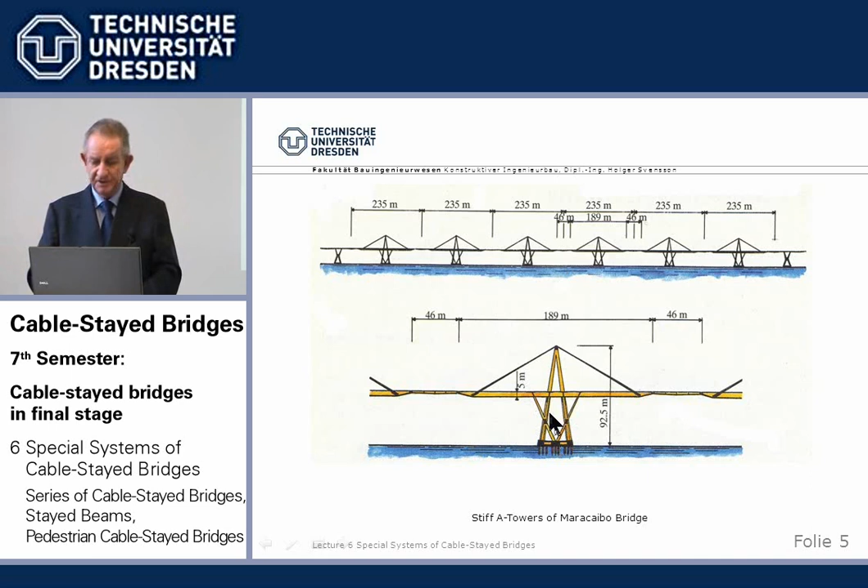We had to replace the cables and things, but it's there. It's the basic solution, use stiff A towers. And we see here the whole bridge. It is a major bridge. It says here 1962, very early.

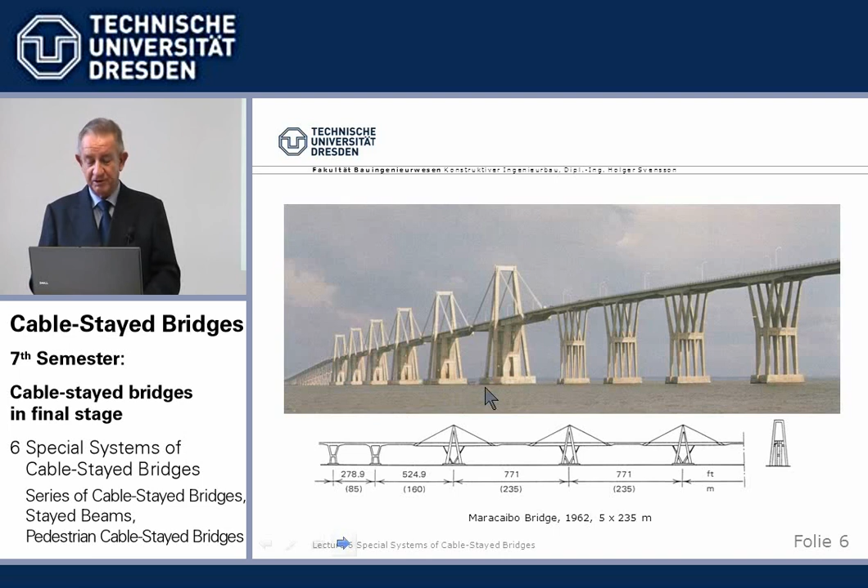So, A towers. Now, another possibility is if in every second span we place a hold-down pier. Then we have something very similar to our regular cable-stayed bridges. And we've actually done it.

I told you about the Orinoco bridges. Now that's the second bridge across the Orinoco. And ship traffic required 2 traffic lanes in the range of 300 meters, I think it is. Separated because there's an island. So one could place 2 cable-stayed bridges back to back.

We need then here a vertical hold-down, perfectly normal. We've retained the tower head by the backstays.

Now, since this is also a railway bridge, I told you about building railway bridges there in Venezuela. Railway bridges have very high braking forces, much higher than roadway. Whenever you have to deal with a railway force, the load is higher and things, but the main problem is the braking. Now, if we have a long train here and they have these heavy ore trains there in Venezuela with real high braking forces,

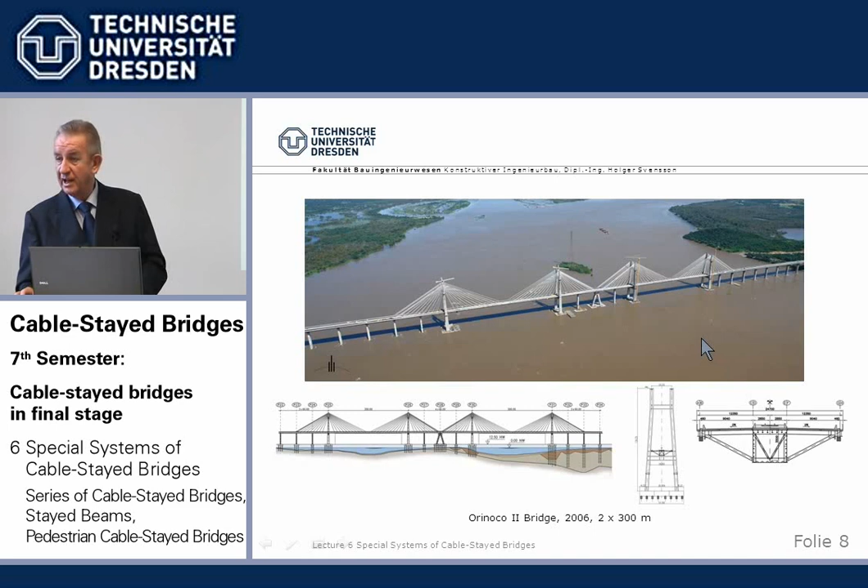We can then use various ways of tying back or connecting the tips of the towers. We can use a straight line, tie the tip back to the next one, or we can overlap.

Here the problem is that these are considerable spans often. If you remember the sag and the effective modulus of elasticity I told you about: the less tight we make this cable, the bigger the sag, the smaller the effective modulus of elasticity, the less effective these cables are. Well, say, okay, use big cables and pull. Easy, but then where does this force go? It has to be carried all the way back in the beam, and the more I stress it there, the more compression I have in the beam, which costs money again.

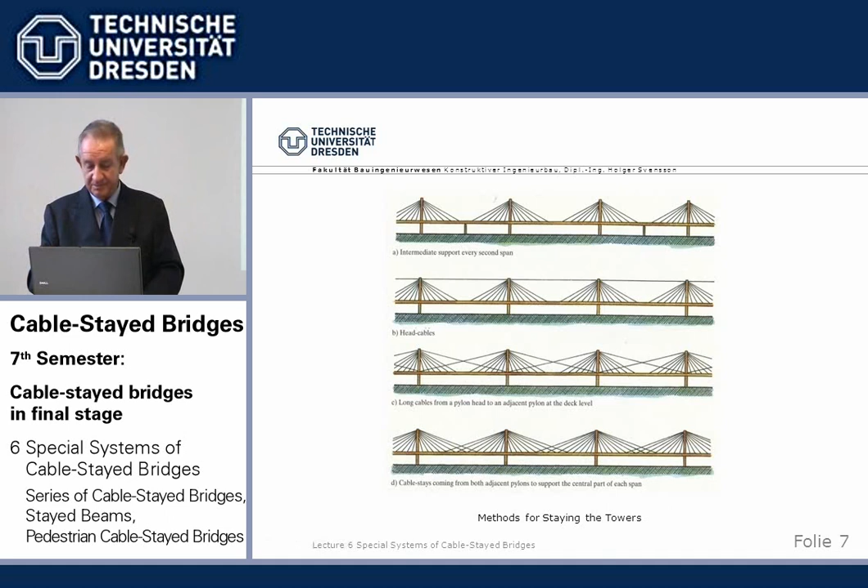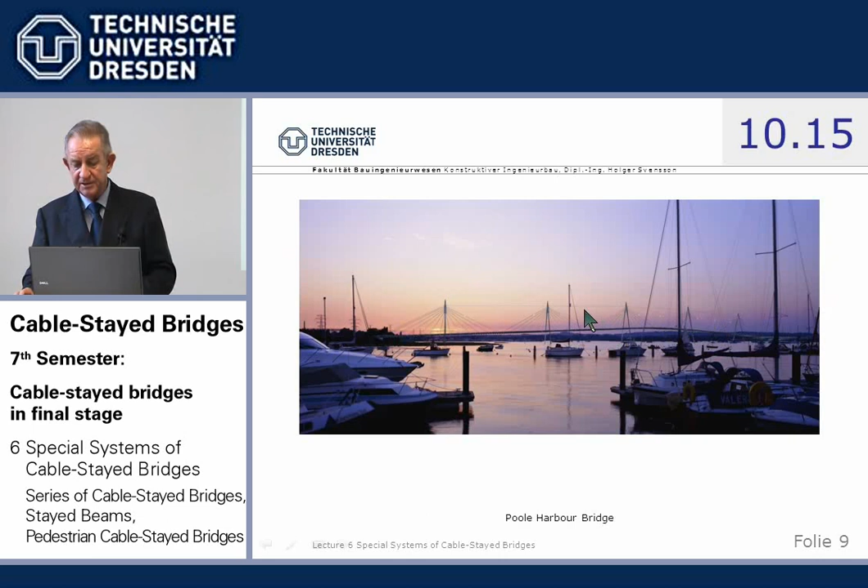So it's a little bit of playing around, and I'll show an example. This was actually only a design for Poole Harbour Bridge in the south of England - now it's two triangular flaps of a bascule bridge which is built. But there was a design which, if you look very closely, used a series of cable-stayed bridges, and the tower heads were to be connected by horizontal cable. Built is the Munksjö Bridge in Sweden. If you look closely, you see several main spans, and here is a twin cable which ties together the tower. So those are examples.

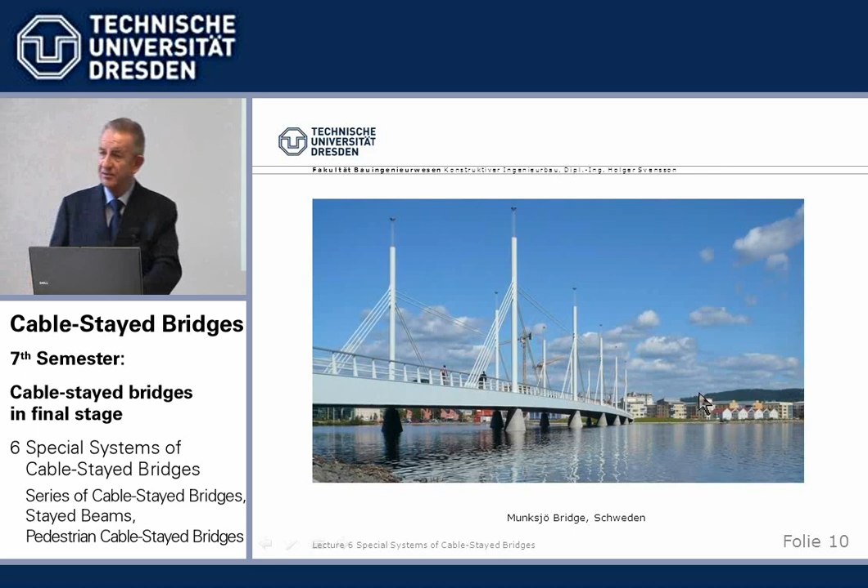Examples for tying the tower head to the next tower at beam level is the Ting Kau Bridge in Hong Kong, which Schlaich Bergermann did. You see here, it looks a little awkward. The big tie-back cable has a visible sag - otherwise, the forces would have been too big. And it sticks out like a sore thumb.

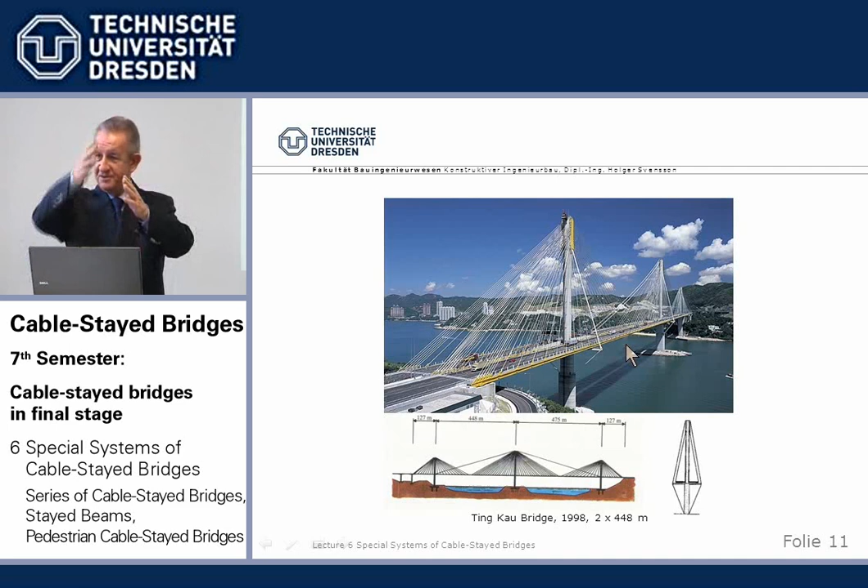Optically or visually it's a little bit questionable. Unique also that the towers are also stayed transversely. Towers are slender, and in order to keep them in place transversely, they are stayed transversely. You may remember our very first lecture, I talked about the French name for cable-stayed bridges, pont à haubans, and I told you that haubans are what we call in German Wanten - left and right of a sail ship mast to keep it in place, shrouds in English. And that's a cable-stayed bridge which uses this system of transverse staying.

The third possibility was purely theoretical until what - two years ago. When I made the first draft, I had the system in but had no example. But then Ove Arup made a design for a new Forth road bridge in Scotland and used this type with overlapping stay cables. I said, beautiful - now I have an example for this theoretical thing. There were two bidding groups, and we were lucky enough to be with the winning bidder, my company, and we are currently doing the detailed design for this one. It seems to work - overlapping of the stay cables in the center.

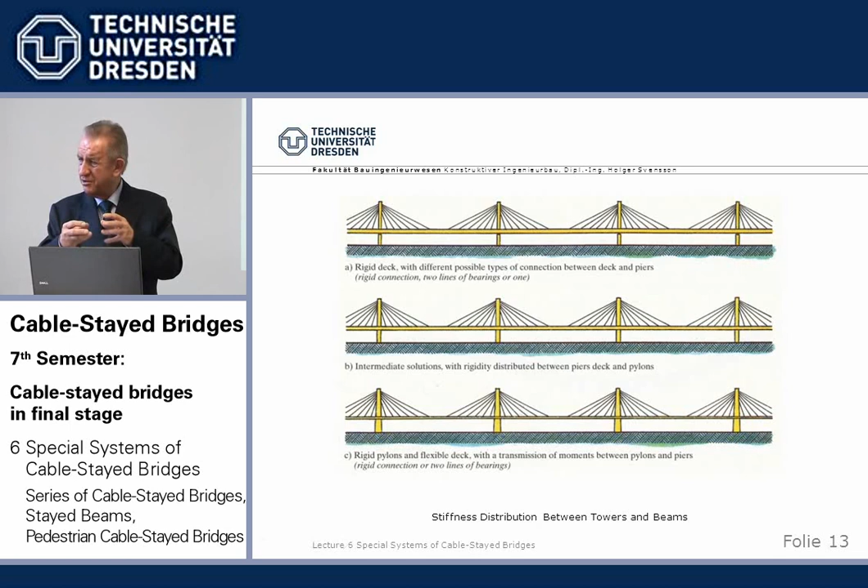Next possibility is to use a frame system connecting the beam and the tower. One can then play with the stiffnesses. You can either say we make a strong beam and just hang it up on a small tower, or we say we make very strong towers and hang up a light roadway slab. That is really playing with the stiffnesses. It's not so very obvious if you look at the system what it is.

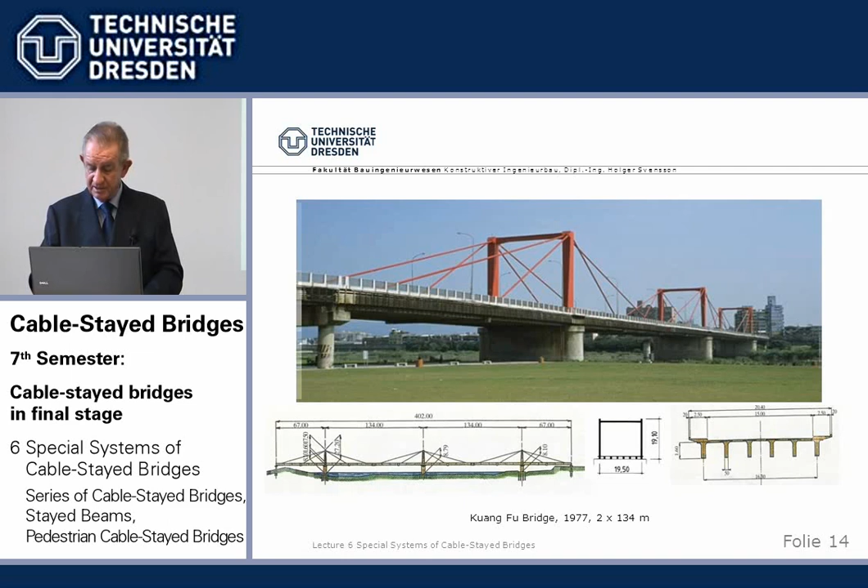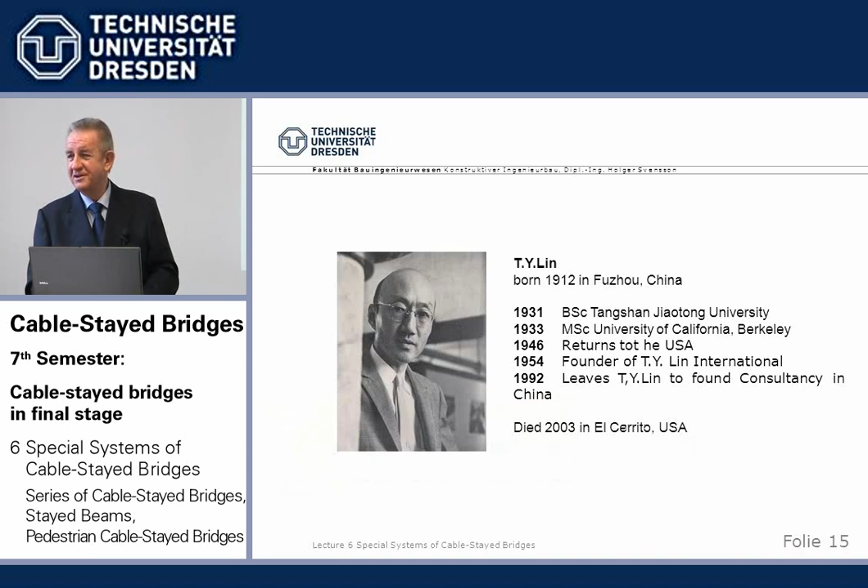One example is the Kuang Fu in Taiwan by the famous US engineer T.Y. Lin. Here he's very young - I knew him when he was older, a typical outstanding Chinese engineer who lived in the US all the time. Outstanding ballroom dancer too - when we had some festivities, he danced very well, T.Y.

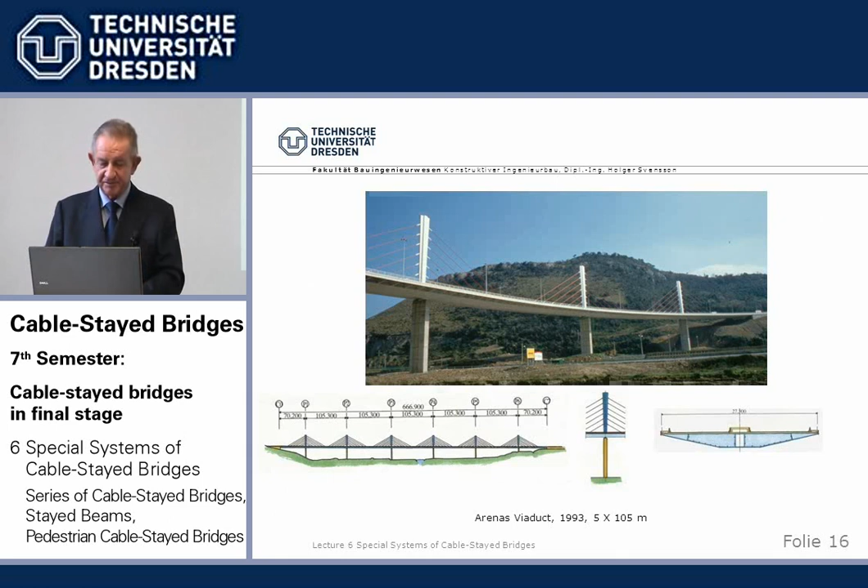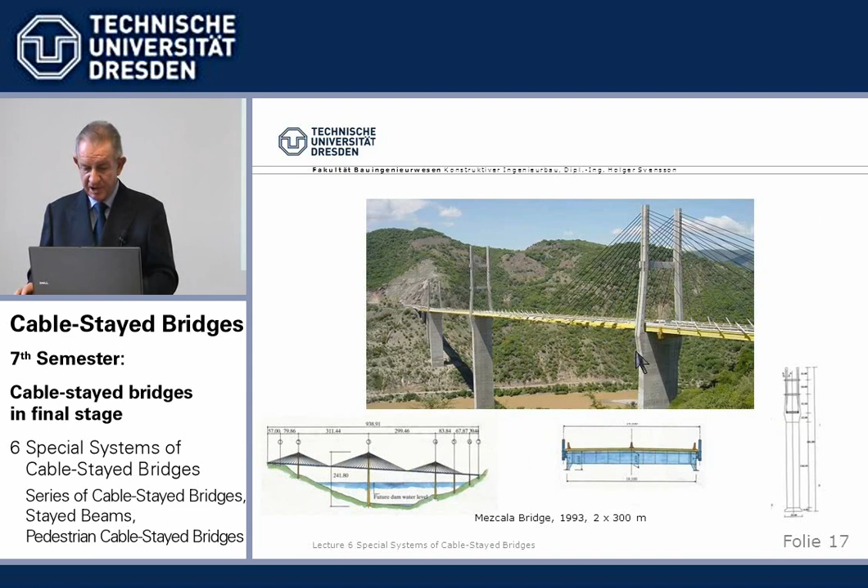Another frame system is the Arenas viaduct, by the Spanish engineer Arenas - or the Mezcala Bridge, all in Mexico, for a new highway across Mexico. There they had to cross wide valleys. Composite designs, concrete slab, steel, and frame action in bending - this whole thing works, one just has to calculate it.

Another very interesting bridge is the Sunniberg Bridge by Menn - he's not here, we had him somewhere else - in Switzerland, near Klosters, across a valley. Architectural considerations by the engineer drove the design: they said, okay, we're already very high, 140 meters above ground, so we don't want another 100-meter high tower in the beautiful Swiss Alps - doesn't look nice. So they wanted this as low as possible, with towers sticking out just above the roadway slab.

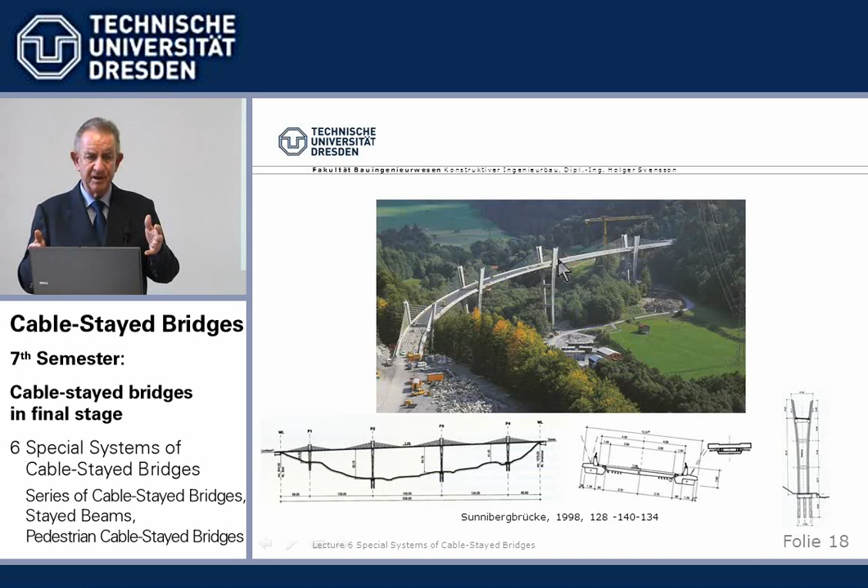Of course, we want a very slender roadway slab, and so came out something which we could also summarize as a, let's say, extradosed cable-stayed bridge. I prefer 'stayed from above,' but anyway it's something like that. It's a mixture between a continuous girder and additional stays on top of the piers. The whole thing was curved, so you had to adjust the stays to the curvature, and there are deviating forces. It's quite involved, a very nice, technically interesting design, and an excellent solution for this beautiful Alp valley in Switzerland.

One of the biggest, most imposing recent series of cable-stayed bridges is Rion-Antirion in Greece. This will be part of a special lecture next semester where I show you in detail how that was built, under very difficult earthquake conditions. The beam is continuous over 2.5 kilometers, hanging only in the cables with no vertical support, with plus or minus 2.5 meter movement joints at the ends for temperature, shrinkage, and creep. It's composite, and the towers stand using A-frames in both directions - longitudinally and also transversely for the wind. So if we want to use the word quadruple legs, we have 4 legs on each tower, and every section stands by itself.

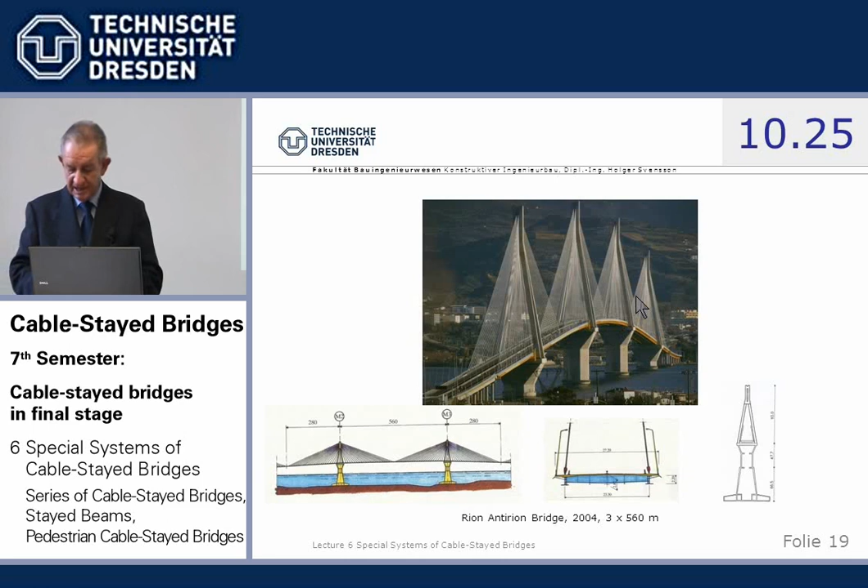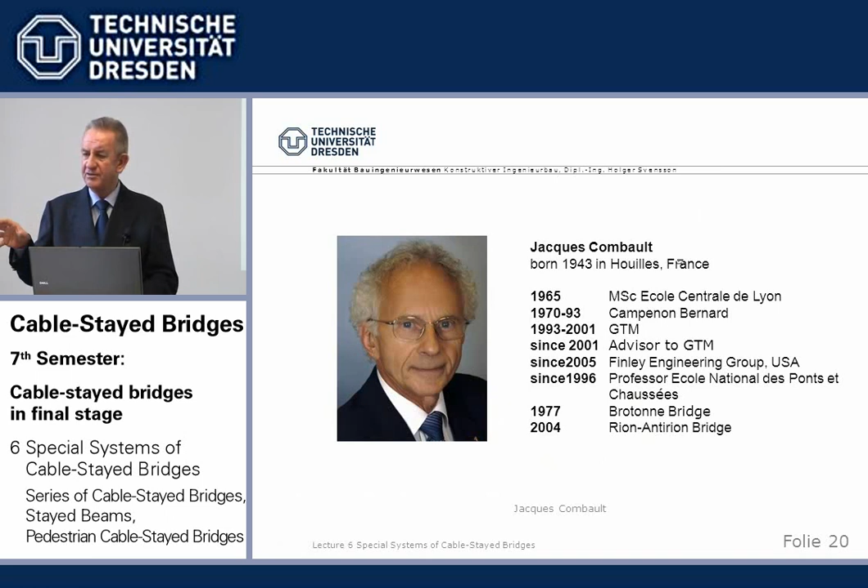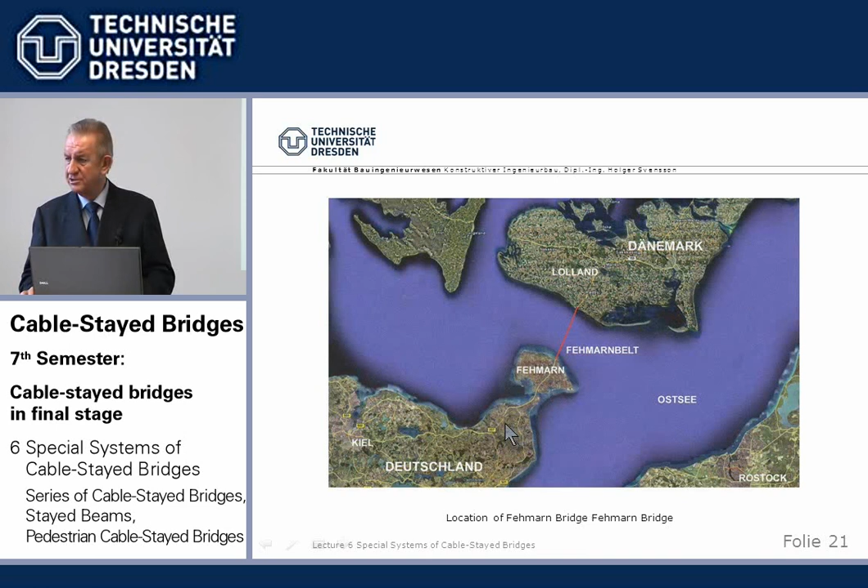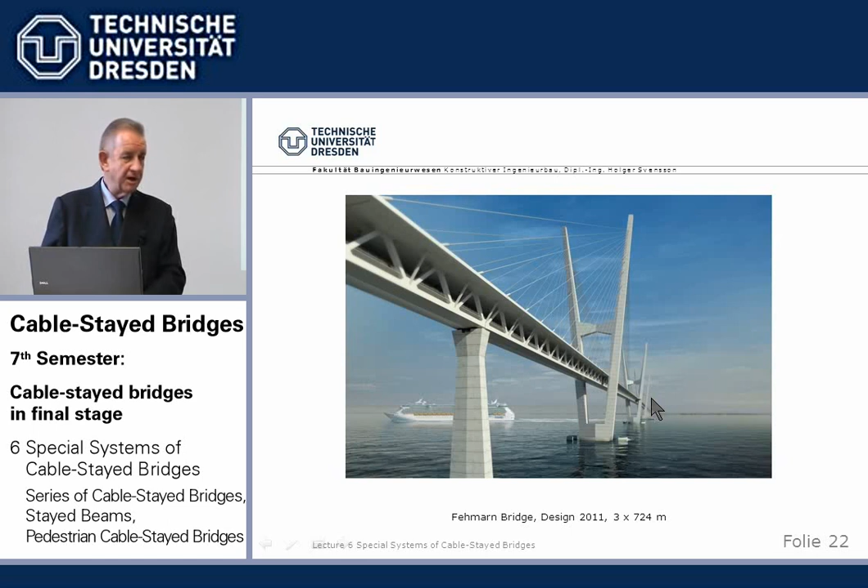Here was Jacques Combault. Another interesting project in this connection is the crossing of the Baltic Sea, 19 kilometers, which is under design. Our group designed a cable-stayed bridge with a truss using a different tower design - basically A towers standing by themselves. However, due to political reasons, most probably the tunnel will be built and not our beautiful bridge. Well, such is life.

Other possibilities of using frame actions, and in addition, we have to cater for changes in length. If we have a drop-in girder or just a joint, the driving comfort suffers, because whatever you do, you'll always get the feeling there's some sort of joint if you don't have a continuous structure. The worst is in precast slabs - somewhere in Italy, the Autostrada del Sole, where you go bong, bong, bong, bong, bong, bong.

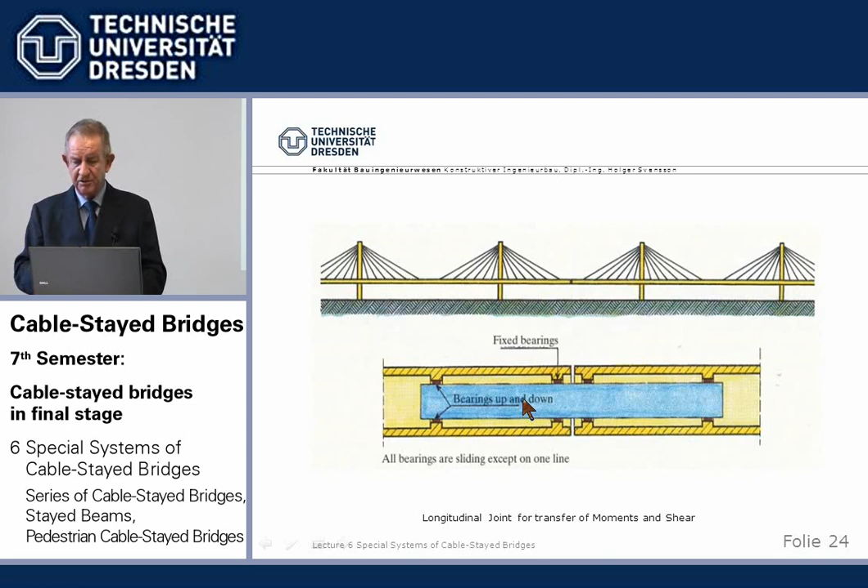So it's better to avoid these joints, at least where they make a kink due to creep or whatever. It is possible to use a joint which is stiff in bending, for example using 4 positions to support such a beam. It's a little theoretical - it can be done, but I don't think it has ever been done. So the best is to avoid the joints.

These stiff elements, where we have problems with changes of length of the beam, create two requirements on the towers. On one hand, the tower must be able to carry live load in just one span, so it must be stiff - I told you an A tower, but you can make it very stiff. On the other hand, because of the changes in length of the beam, and since we try to avoid joints, these towers must be flexible horizontally against changes in length from temperature, shrinkage, and creep.

There's one known solution where we split up the tower in the lower part like a washing cloth. Now, if we have a load, the force runs up, the moment goes down, and the moment is split into a force couple - compression and tension - going down these two halves. But because the lower part is split in two, it's very soft horizontally. We know this system from free cantilevering: when we free cantilever out, we can take the moment, but we're also able to move horizontally. So that's the trick here - stiff above, splitting the moment into a force couple of tension and compression, but once you split it, the horizontal stiffness is very low, so it can move with shrinkage and creep.

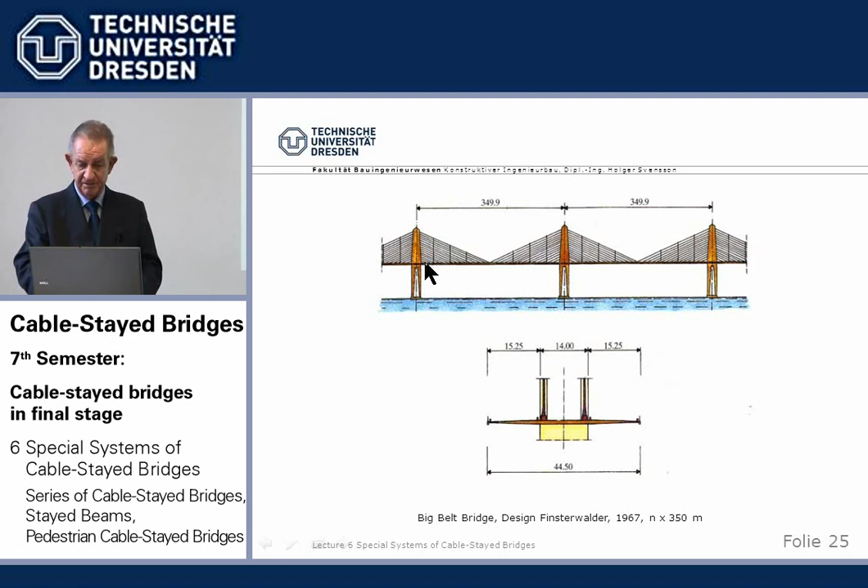That was an old design by Finsterwalder for a crossing of the Great Belt, from 1967, but it's a very nice idea. Other systems - I'm just thinking, in modern days the same idea was taken up by Virlogeux in France for the Millau Bridge, which we also have a special lecture on.

Required a very long crossing of the Tarn River in the south of France, and it is done. We have an A tower, which is stiff in bending in this direction, we know. And then we have the up to, I think, 270 meter high piers, which are split. You can see it here, just split in two parts.

The moment from the A is going into the two legs of the split tower in tension and compression. And the whole 2.5 kilometers beam are continuous. Their fixed point is basically in the center. And from there the beam moves in and out with temperature. It's a steel beam, but the split piers, split in the top half, can follow. That's a trick. We will see that in some detail.

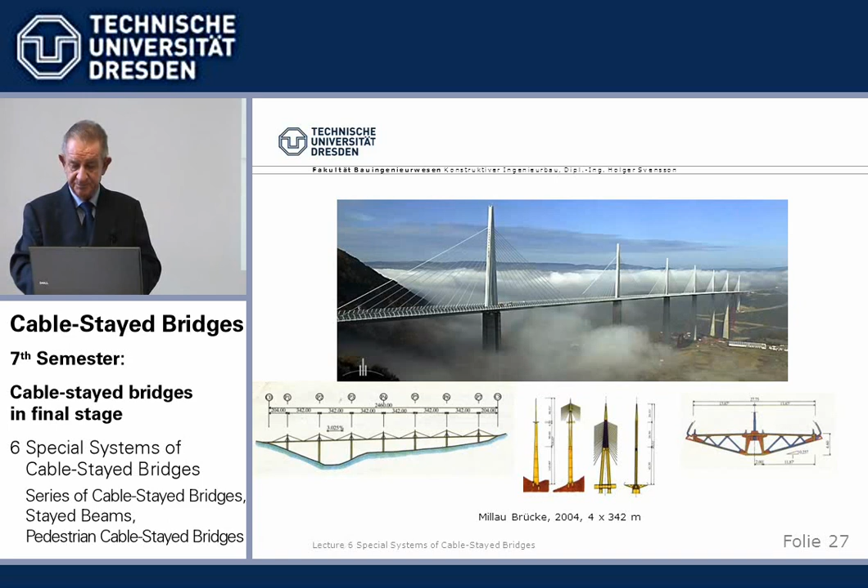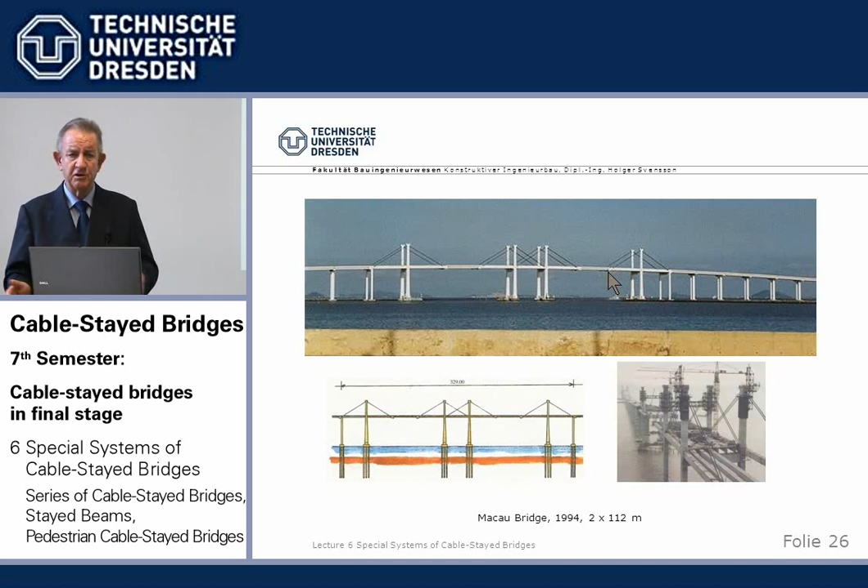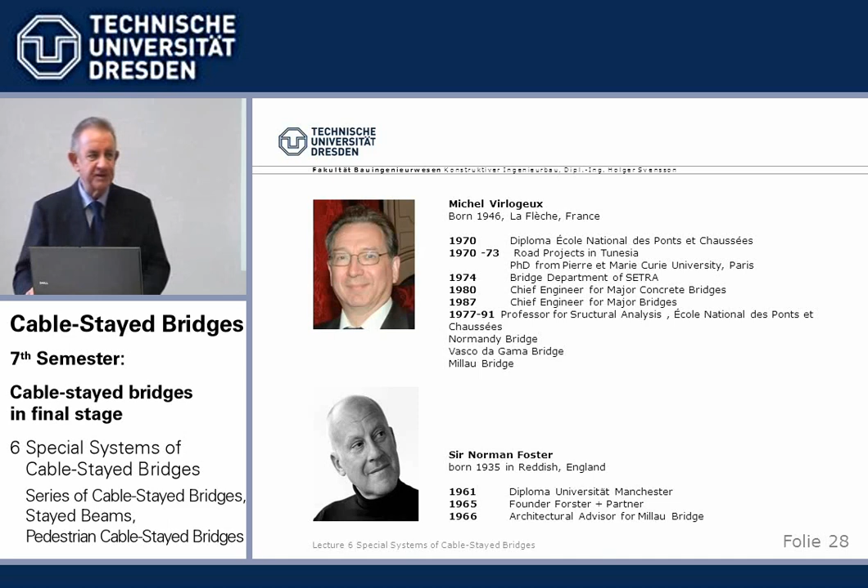Here we have Michel Virlogeux, the engineer of the Millau Bridge, and the architectural advisor was the famous English architect Sir Norman Foster. I stress, however, contrary to some publications, Foster did not design the bridge. The bridge was designed by Michel Virlogeux, but Foster gave a hand in shaping that thing beautifully.

Okay, now those were a series of cable-stayed bridges. Now we come to stayed beams, as I call it. We had the problem in the, when was that? '78, yeah, in the 70s. Freeway from Stuttgart down to the Lake Constance, Bodensee. Large valley, Neckar Valley, and the slopes were supposed to creep, so no piers down there. So that meant we had side spans of up to 260 meters with inner spans of 180 or something. Now, that's extremely awkward, and we wanted to have a constant depth beam and all that.

I was involved, so I know the story, but finally the idea came: okay, we stay these end spans from underneath. You see? It stays with the king post in between, lock coil ropes, and that works very nice, especially for permanent loads. For permanent loads you halve the side span, so instead of 260 meters we had 130 here. That helps a lot. It's not very effective for live load. It helps only a little because the stiffness of these stays is small compared to the stiffness of the beam, so the increase in bending stiffness is not very big for live load.

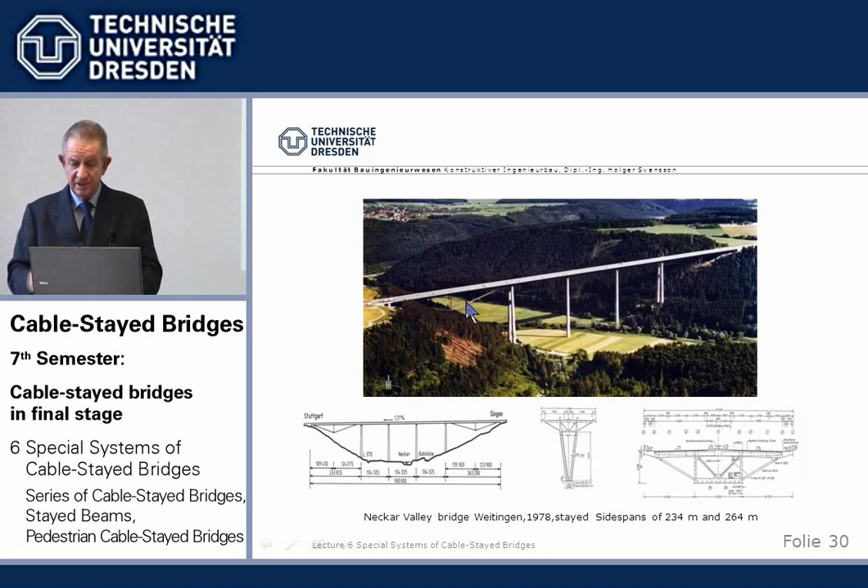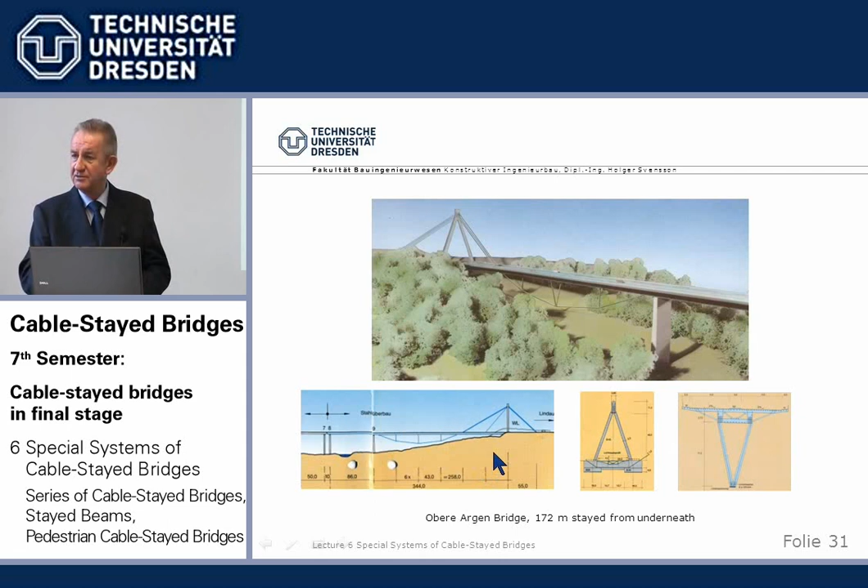Now, you may have heard the word extra-dosed beams, which is a rather odd word. It was invented by a Japanese engineer who couldn't speak English, but it has been adopted. All it means is it's a beam stayed from above. Now, what distinguishes an extra-dosed beam from a cable-stayed bridge or from a continuous girder?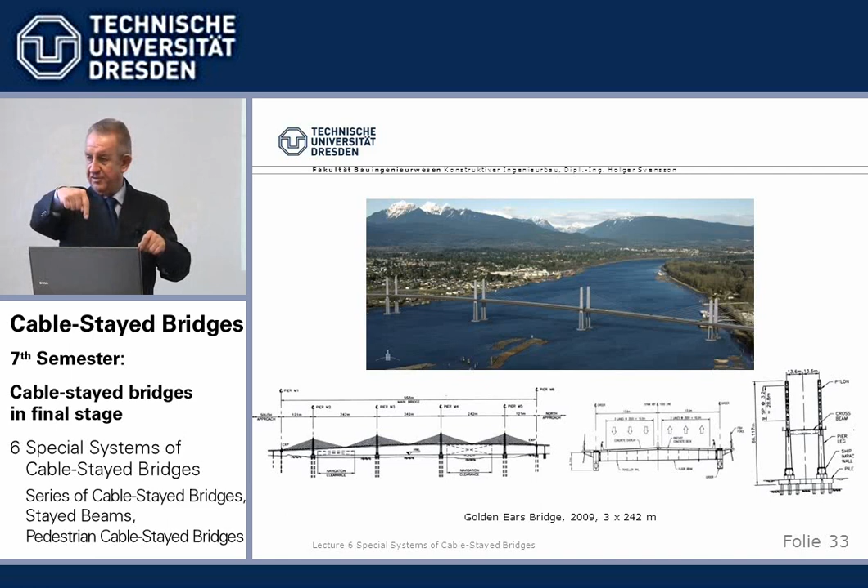I try to explain it by basically the shear transfer from a load on the beam. If we have a cable-stayed bridge, we can consider hinges where the cables meet the beam, and all the force is transmitted via the cable to the backstays. Nothing runs directly, nearly nothing, runs directly from the beam into the tower pier. If we have a continuous girder, maybe haunched, naturally everything that I place as a load runs via the beam to the piers. Now an extra-dosed bridge is in between.

If we place a load somewhere here, part of it runs via the cables, but part runs through the beam, because we have a stiff beam even with a haunch. Typically 50% goes through the cables, 50% through the beam, with the extremes being cable-stayed, nothing through the beam, or continuous girder, 100% through the beam. So at least now you know, when most people don't know what they're talking about when they talk about these darn extradosed bridges, you at least know the idea behind it.

It was invented in Japan, used in Japan. It has its advantages if, due to some reasons, you have a very deep beam, but it's not fully enough. Then you say, okay, instead of having a bigger haunch, I have some stays on top.

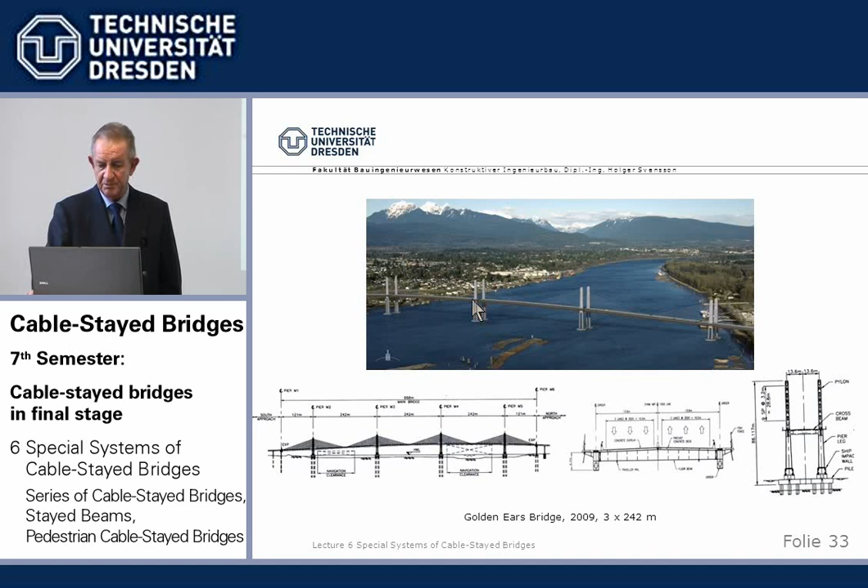Maybe it's economic. An important example is the Golden Ears Bridge in Vancouver, BC, built by Bilfinger. I was checking engineer, and it has very difficult soil conditions. You see here the trick: we have a stiff tower on top, but we have a split pier to be able to take the horizontal movements.

Another one, Tisza Bridge, I was also checking, just for good measure.

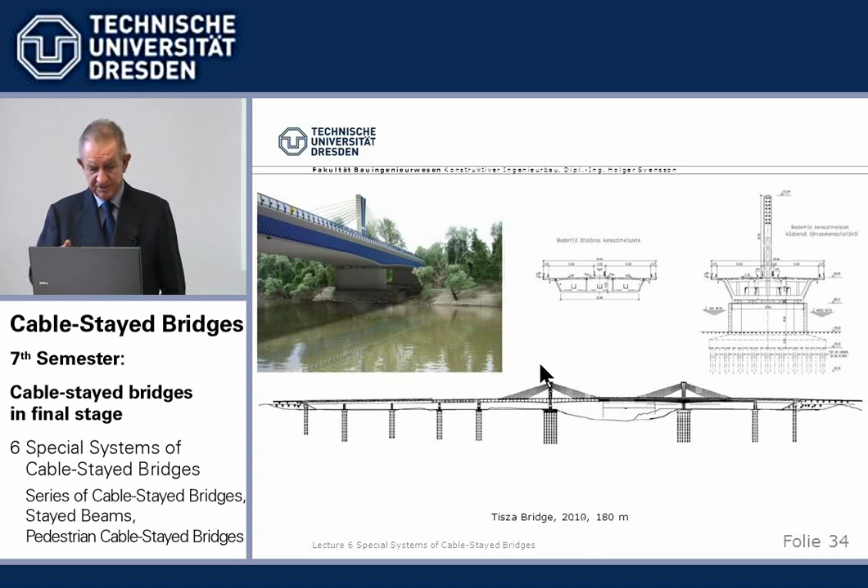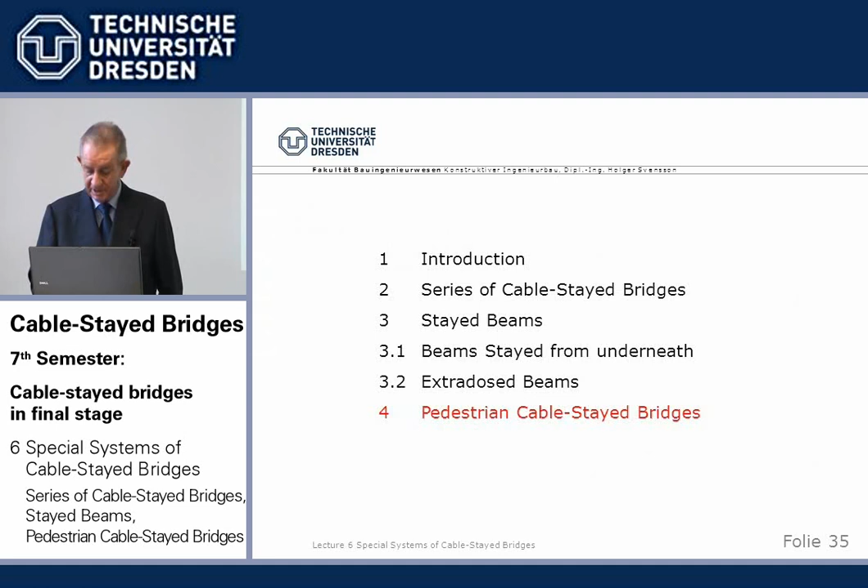And finally, we go to cable-stayed pedestrian bridges. I used to say pedestrian bridges are the playground of bridge engineers, because the loads are comparatively small, just pedestrians, and the spans aren't the real big ones. You can really play around, and unfortunately, it leads to there being many pedestrian cable-stayed bridges which have the wrong flow of forces, designed as a sculpture, beautiful, but the flow of forces is wrong.

And I have always rejected to make a design by an architect which I don't think proper, just to help make that thing stand up. Of course, with brute force, you can do all sorts of things. But there are 2 books out by Schlaich Senior, Jörg Schlaich, and Mike Schlaich, both called Pedestrian Bridges, Fußgängerbrücken, and they give a real big picture of all the playground things there are. I just make it rather small and show more or less rational cable-stayed bridges. If you want the wild ones, you have to go somewhere else - I'm not the one for architectural sculptures.

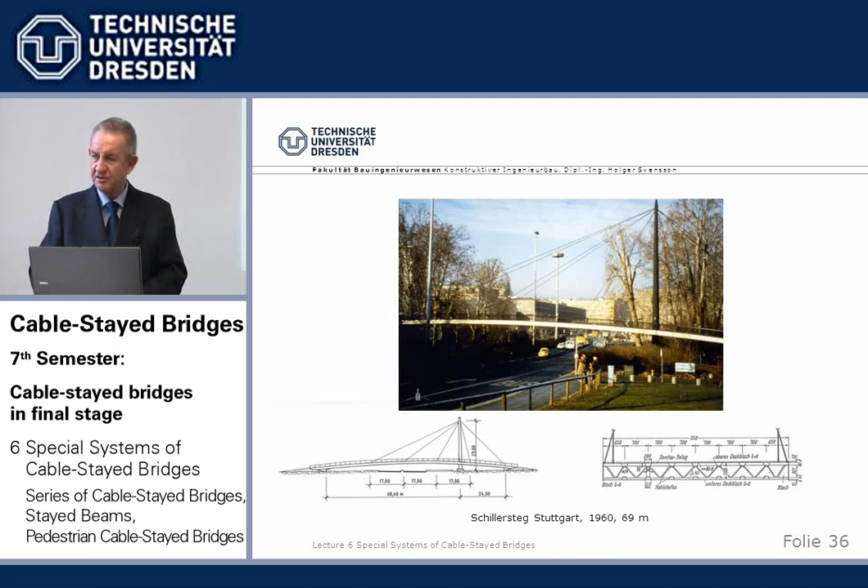Anyway, Schillersteg, very early, very light, the first use of parallel wire stay cables. Another light one, new insofar as it used lightweight concrete in the main span.

For some time in the 70s, it appeared that lightweight concrete may be the one to use in the future. It was used - we had a Rhine bridge, Köln-Deutz, where the center part is lightweight concrete, and some others. This was lightweight concrete precast elements. But time showed the characteristics are not so favorable - it's less strong because of the lightweight aggregates, and it's expensive, so it's probably more or less out of the market. But in the 70s it appeared it would be a good thing. So this is, I think, the only cable-stayed bridge with a main span from lightweight concrete, and all sorts of investigations on shrinkage and creep were done.

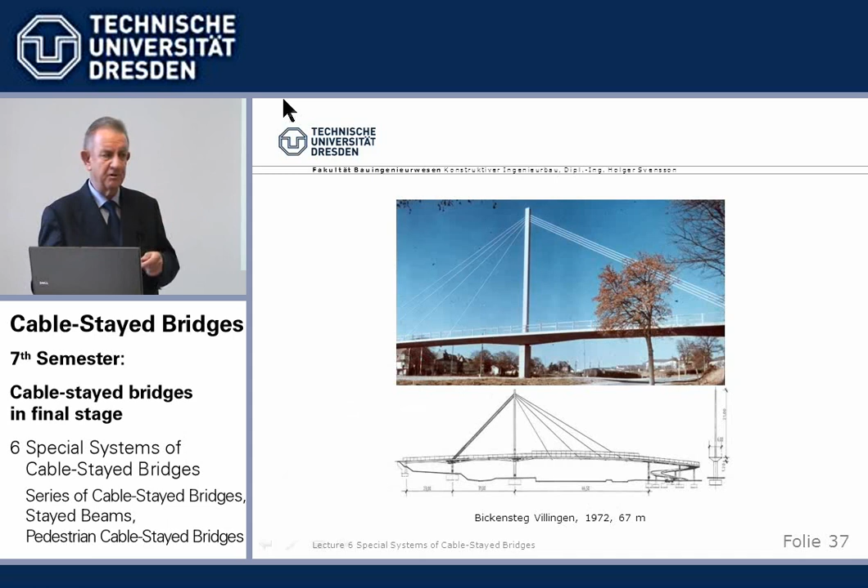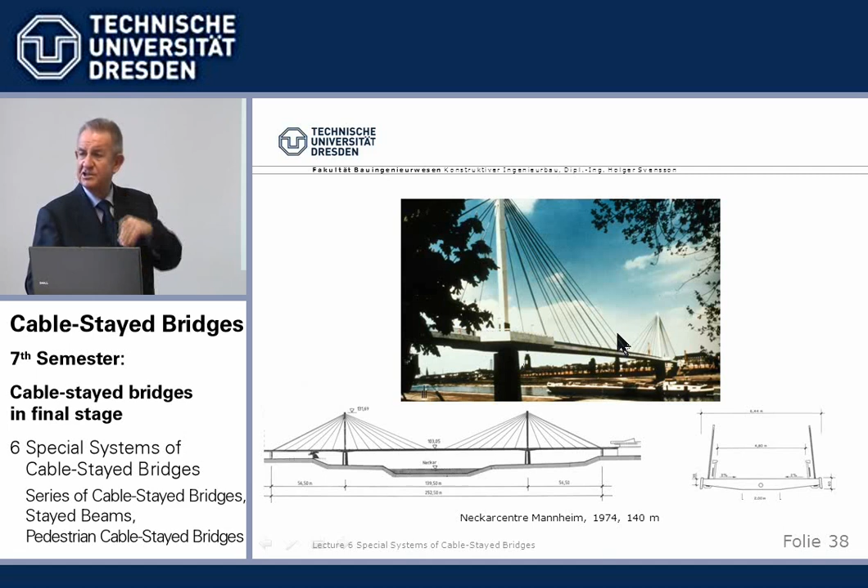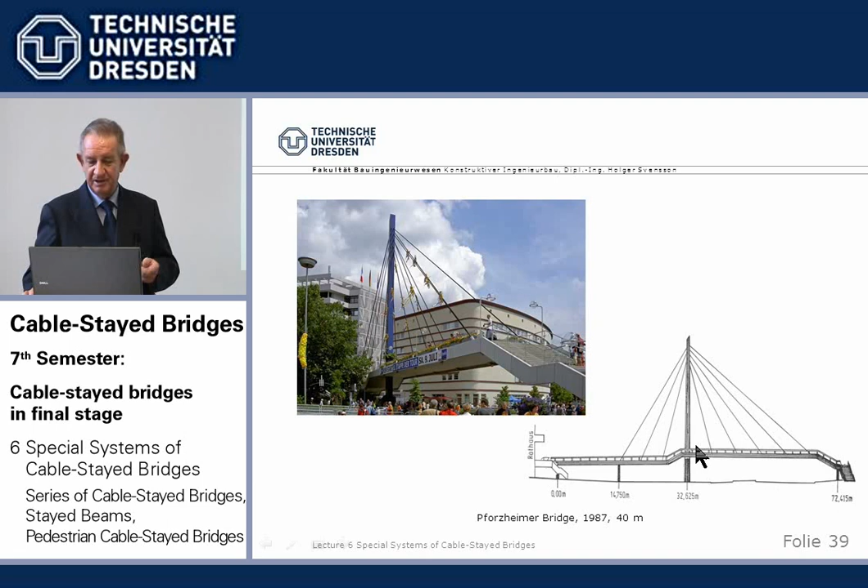And finally there's the Galgenbergbrücke in Waiblingen again, a very thin cast-in-place concrete slab with a straight A tower, and what we use often in our office: this railing with just vertical bars and one top element, in a light red. We like that very much as a light pedestrian railing.

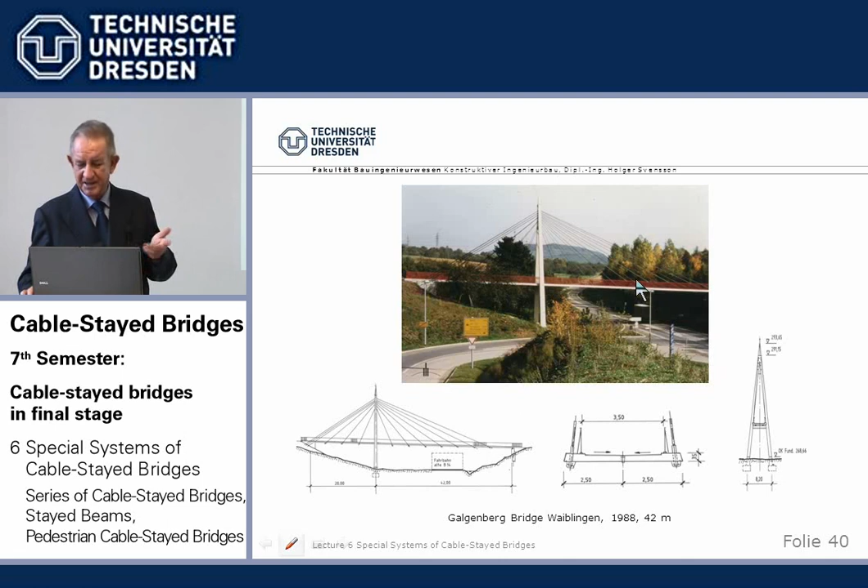Then Ravensburg was a special situation. There is an open tunnel behind the truss here, and a cable-stayed pedestrian bridge—the third one is missing—and there's another curved truss pedestrian bridge in this region. These are basically very different structures: cable-stayed here, a side truss, and a curved truss supported. They were bound together visually, I would say, by using the same bright red color for the steel parts. So it's an architectural feature.

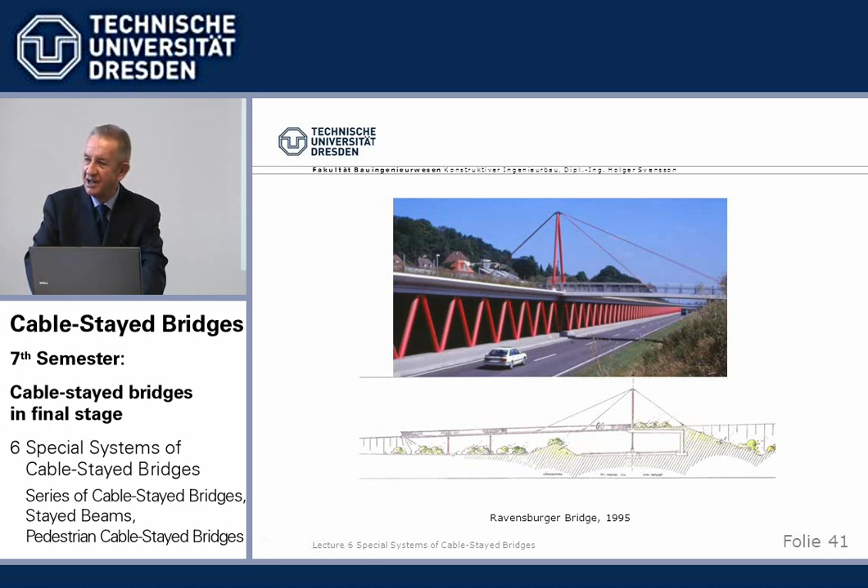I think, well, I have it now in the book, it's section 2.1—no, in the presentations we have it at the end. I think it's lecture 29, when I talk about guidelines for bridge aesthetics. We'll have that again, and I'll show you that.

An important pedestrian bridge across the Rhine River at Kehl. That comes again in bridge dynamics. There are very few pedestrian bridges across the whole Rhine. The Rhine River is the largest river in Germany, and this connects the German city Kehl with the French city Strasbourg. As usual in France, the architect is in the driving seat very often for bridges—he designs the bridge and gets an engineer to help him make it stand. So the design was by a French architect, and we were supposed to calculate it and make it work. It's tricky.

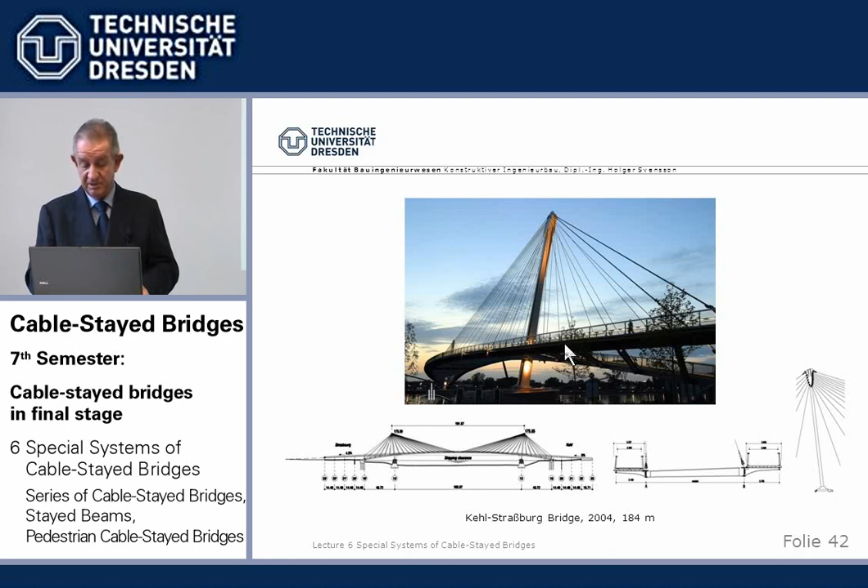And finally, a little cable-stayed bridge, nothing really particular—no, we don't have it here. The tower rests on a steel sphere, so we designed a real hinge there. It was helpful during construction.

So that's what I wanted to show in cable-stayed pedestrian bridges, knowing they are not very spectacular. If you want something really spectacular, go to some other sources. I'm just a plain engineer—I like these plain bridges.

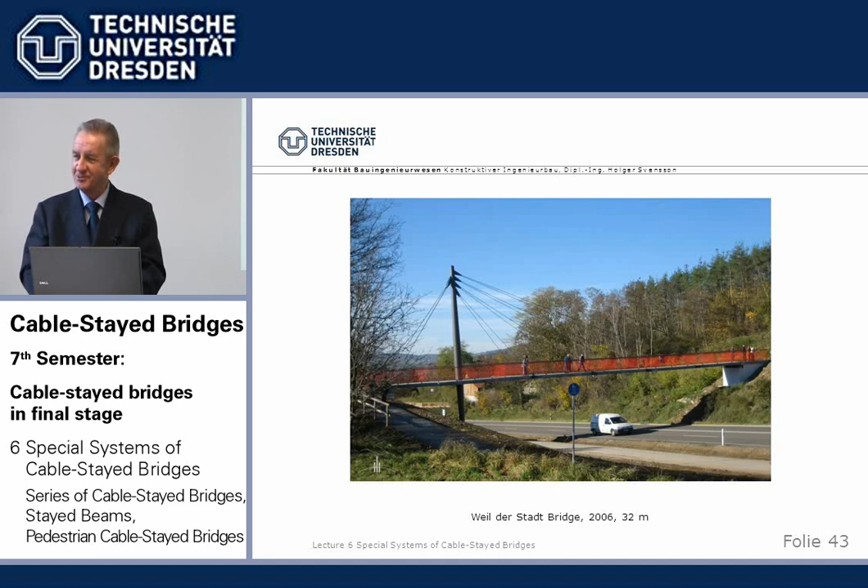So, to sum it up, we had special types of bridges. We had the series of cable-stayed bridges with many spans, where we had to consider how to stabilize the tower head. We can do it with an A-frame, we can tie it down, or make it stiff on top, or split the bottom pier to have bending stiffness while remaining soft in shear. Those are the basic ideas.

Then we thought about beams strengthened by stays, either for the span—if we have long end spans for a creeping slope, we can have a king post in the middle and tie it back—or if we want to increase the capacity of a beam on top of a pier, we can place a few stays on top, which some people call 'extradosed.'

And finally, a place by itself is occupied by pedestrian cable-stayed bridges, because there the rational demands on flow of forces and economy, which otherwise govern our cable-stayed bridges, are a little bit relaxed, and we can play there and do nice-looking things—maybe not the best flow of forces or the cheapest, but maybe very nice-looking.